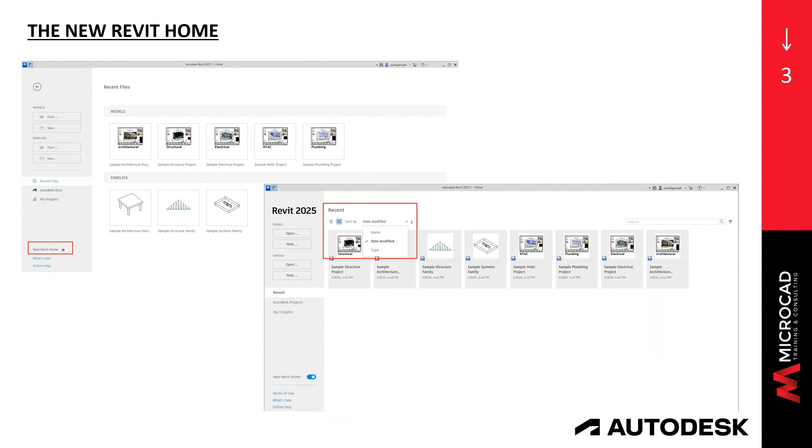So without further ado, let's dive straight into 2025. I am going to try to bounce between my PowerPoint presentation and the actual version so that you see the interface. The first thing that I want to point out is that there is an option of choosing a new home, so that the way that you see the home screen changes. Let me show you that live in Revit.

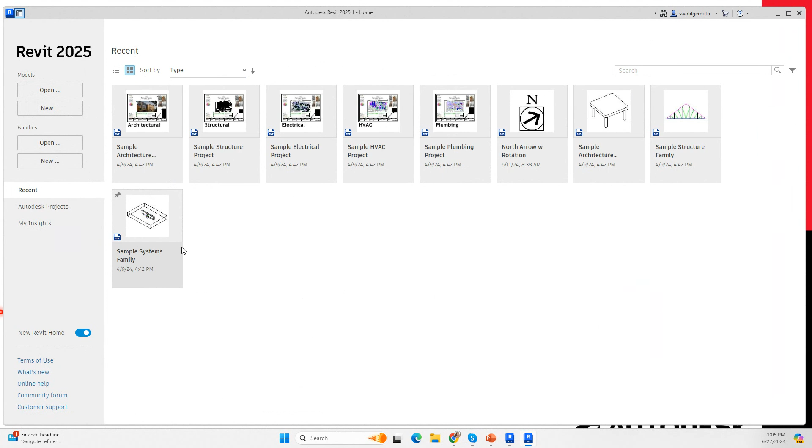When you come here to the Revit interface, notice down here it has this button that allows you to turn the new home on. And this is what it does. And then it allows you to sort your recent projects either by date modified or by type. When you divide them by type, it will give you Revit projects and families afterwards. So that is something that I wanted to make you aware of. Let me go back to my PowerPoint. That is what is explained here.

Next big improvement is that when you have coordination models and you go to Collaborate and you go to your coordinate tab, you will see the coordination model changes, and it will show you the changes by showing different colors. So new elements that have been added, or elements that have been modified, or elements that have been deleted will be highlighted.

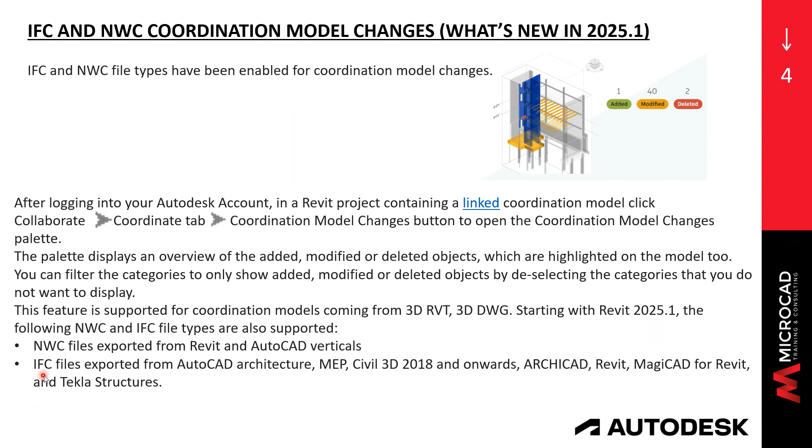As you always know, Autodesk pushes out the release, and then usually there is a 25.1 version of the software. So in the latest version, this will support Navisworks files and IFC files.

Next thing, and this I find really cool, is that there are sheet collections, meaning that you can create a sheet collection by going to the Sheets tab and right-clicking on it. You can create a new sheet collection, and then you can divide and classify your sheets. And then you will be able to print specific sheets.

So you can divide your sheets by design documentation, and then the sheet collection will be assigned when you are in the actual sheet. And then when you go to a floor plan, the floor plan will tell you in what sheet collection it is located. So it's a new parameter.

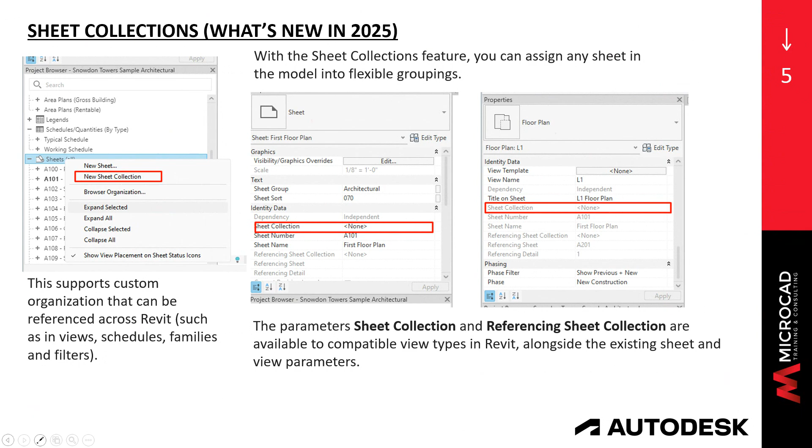Let me bring you into Revit and show you how that looks exactly in the Revit interface. Just give me a moment. I have a little dialog box hidden here in the background. Yes.

So, as I was saying, if you come here to Sheets and you click on New Sheet Collection, it creates this collection here that you can rename. So I'm going to call it, for example, DD, and then I can start putting sheets. It's like a new node under each sheet. Okay, back to my PowerPoint.

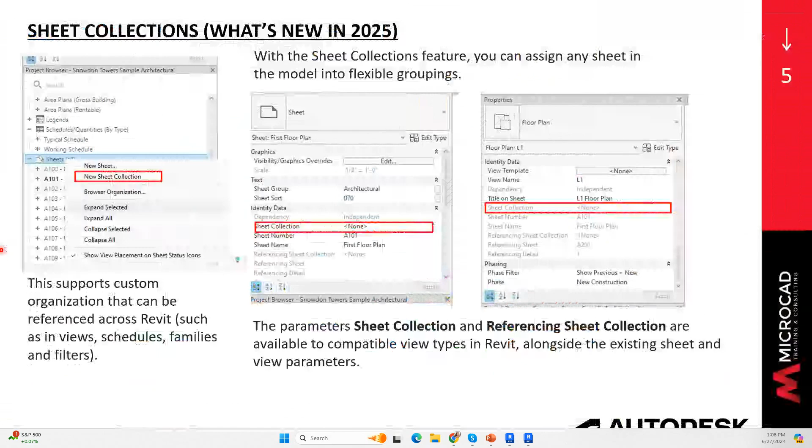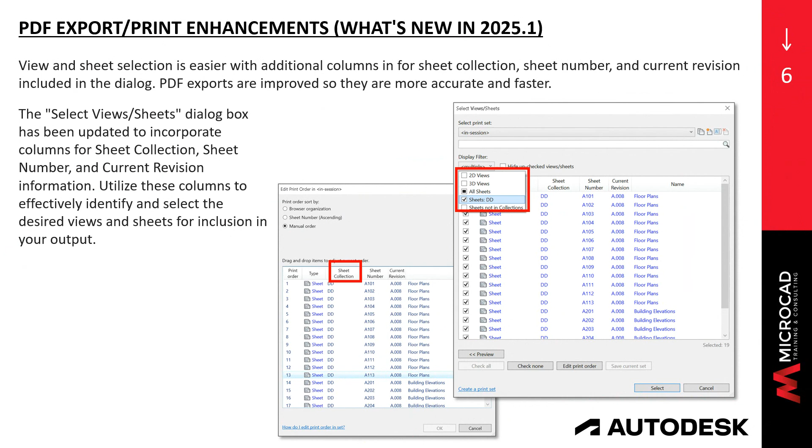With that new sheet collection, when you go to print, you will be able to define in your Select Views and Sheets dialog box that there will be a column that allows you to select the sheets that are in a specific sheet collection, or you can filter them out, right? When you go and you start to create your print sets, you can filter your sheets by whatever collections you created. I find that feature really useful. My little nerdy hands were doing a clappy dance on that.

For our MEP users, the export to gbXML is supporting the most recent version of gbXML. If you know, you can export your MEP models, create your spaces, create an analytical model and export it to gbXML, and then use that in your heating and cooling load software. So this is including support for HVAC data systems, zone equipment, air systems, and water loops. So this is very important for our MEP friends.

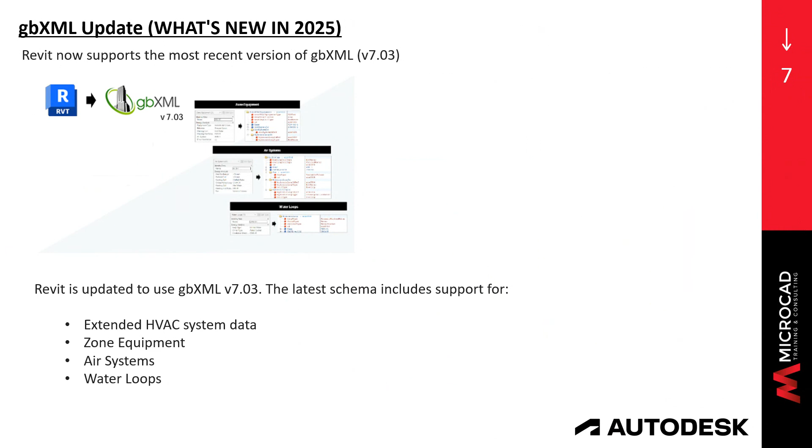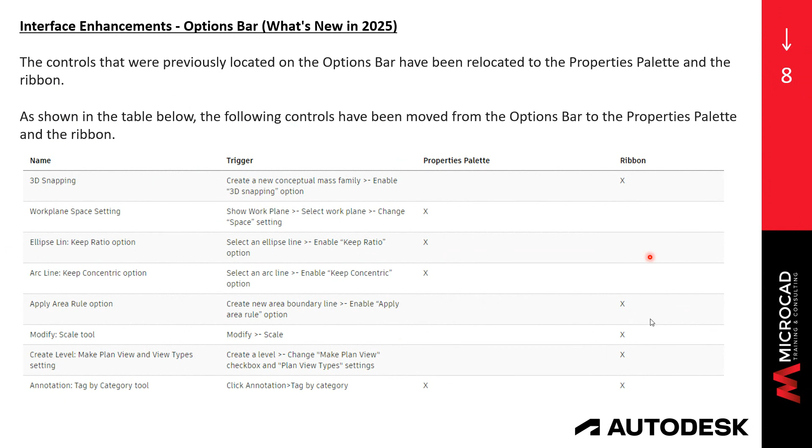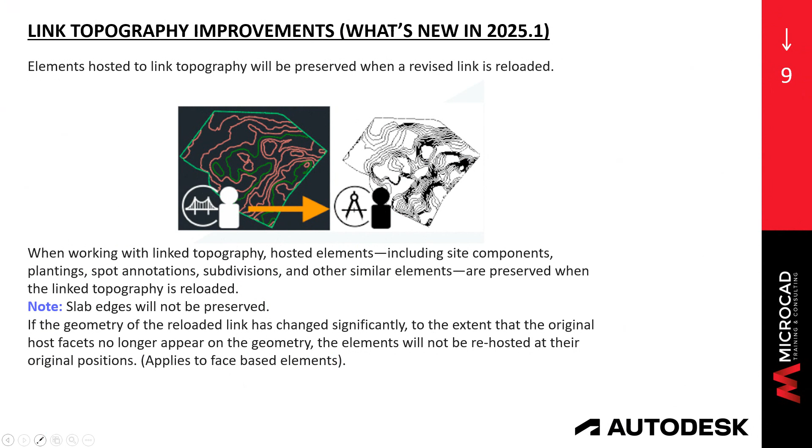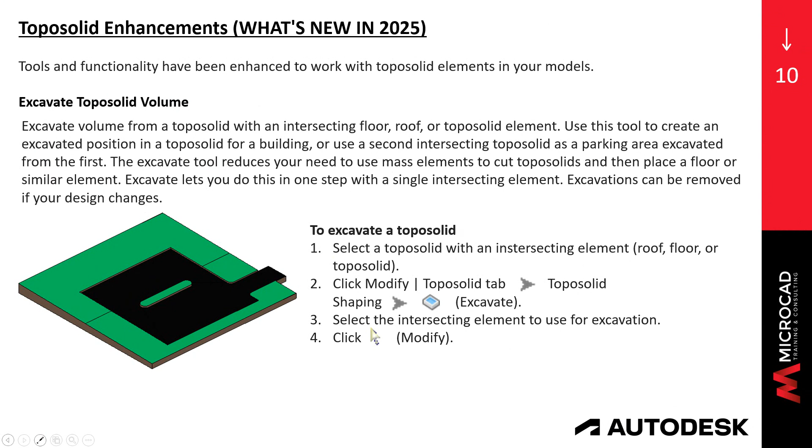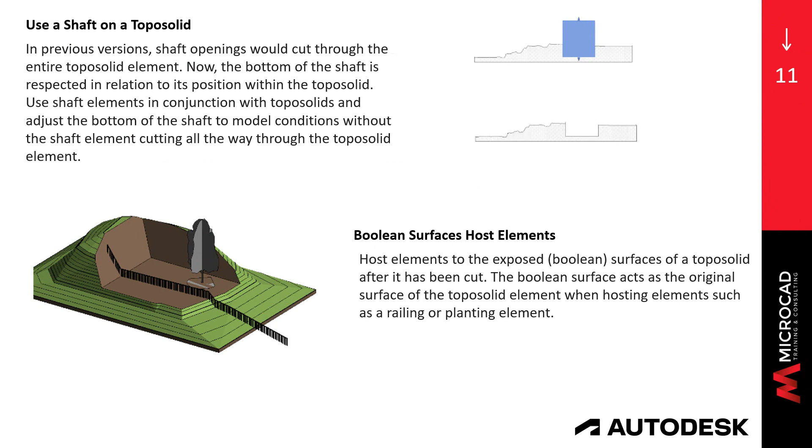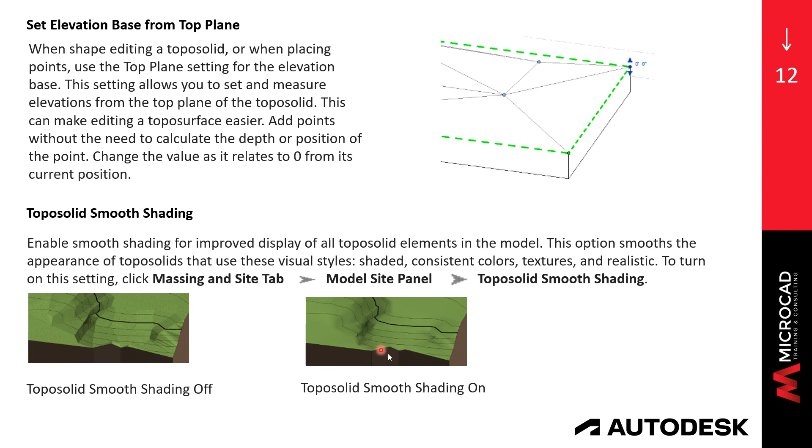Okay. You can enable it through the Massing and Site tab. You can go to Model Site, and there is a toposolid smooth shading. And then when your view is being shaded or shown in realistic mode, your topography won't look faceted. It will look more realistic, better shaded.

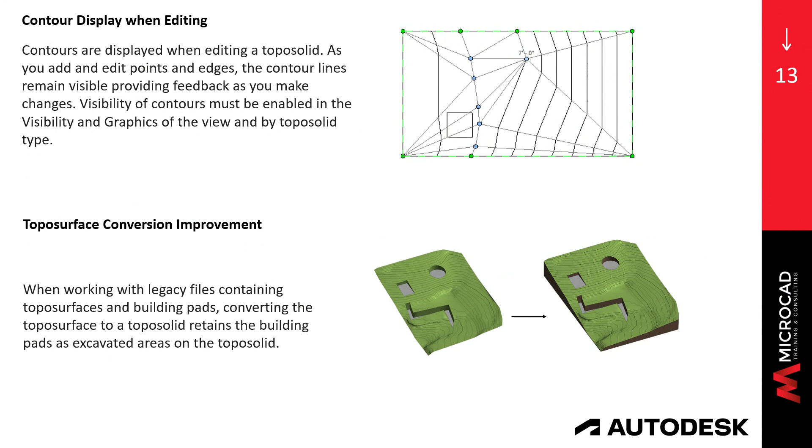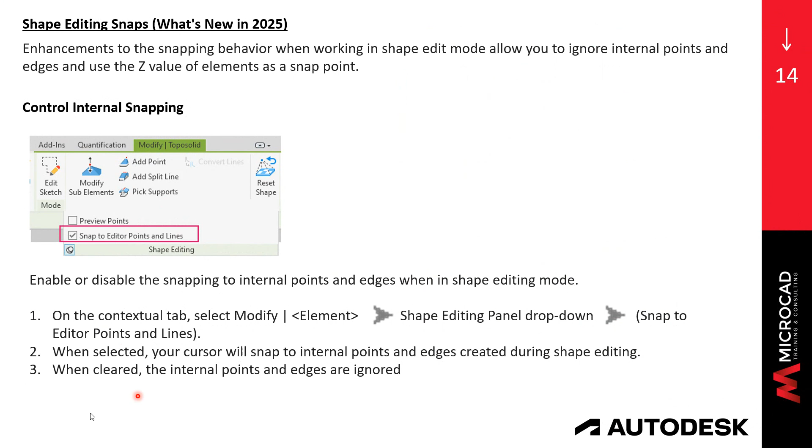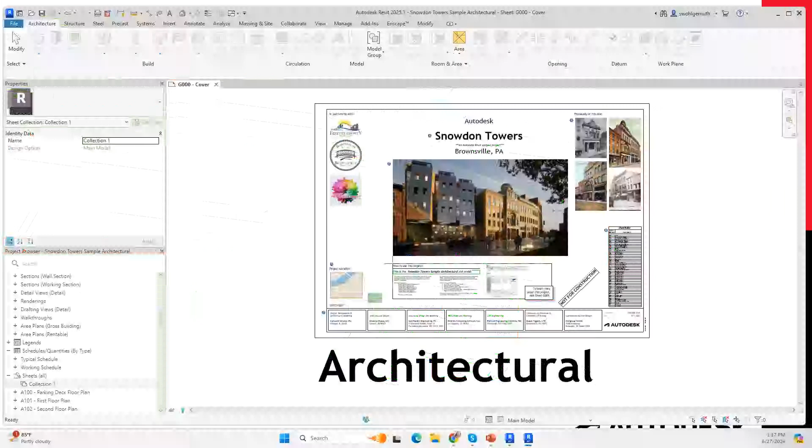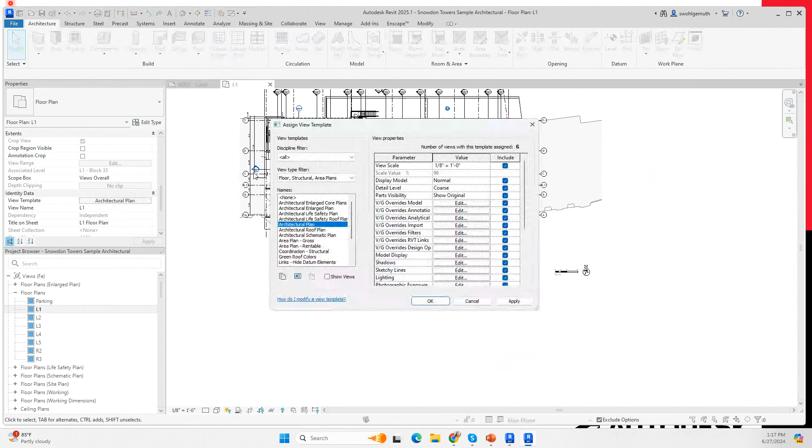The next improvement that I need to talk about, and this is also really, really cool, let me jump into Revit for a moment and go to a floor plan view. And I'm going to use this floor plan, but I'm going to jump a little bit here off to the side. Just give me one second. Yeah, I need to have a little bit of freedom of movement here.

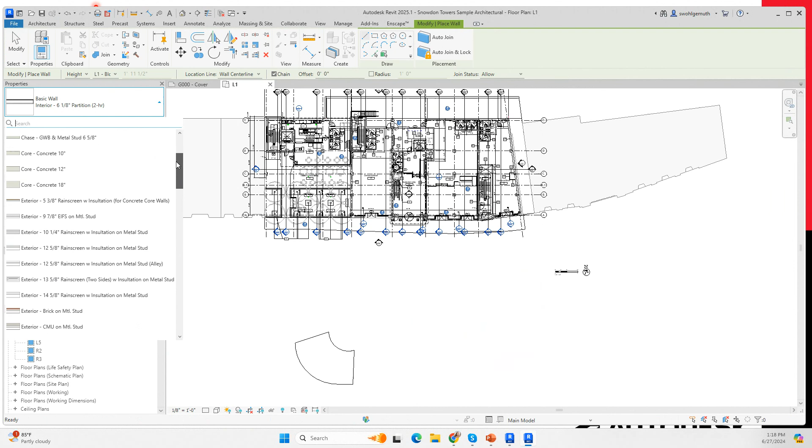And I am going to start a wall command, and I'm going to choose this exterior EIFS on metal stud. Part of the things that you need to do on this wall for this next tool to work is that you have to allow the wrapping, right? So I'm going to allow exterior wrapping, and I'm going to allow here both. And I'm going to draw my wall. I need to see my layers, so I'm going to show them as fine.

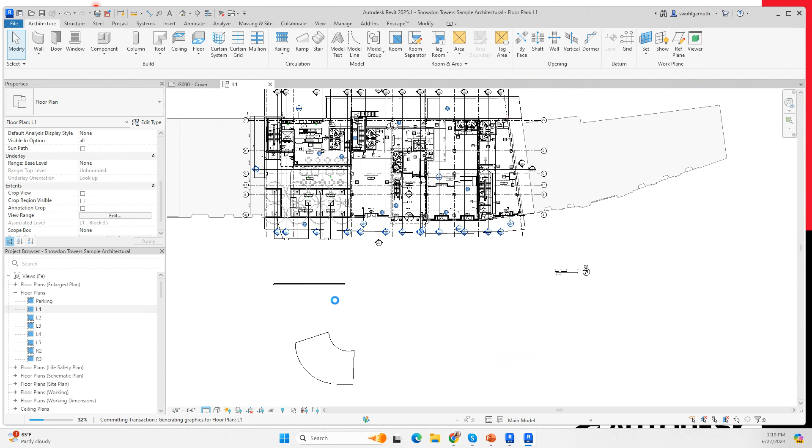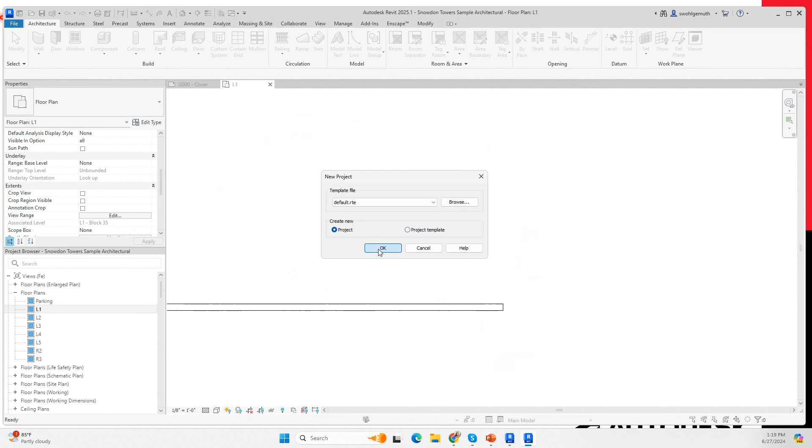So the first tool that I'm... sorry, just give me a moment. Just bear with me one second. Let me show you this better on this project. And I like this wall so much better. So a couple of things that I want to show here that happened to the wall tool.

I need to have fine. So when I select the wall, notice that in canvas now, you have the option to allow or disallow the joins. And this is happening in the actual canvas. So if I disallow the join, this happens, or I can allow the join back in. Before, you needed to come somewhere here and allow the wall joins and start this tool and come and choose the different options. So this is happening in canvas now.

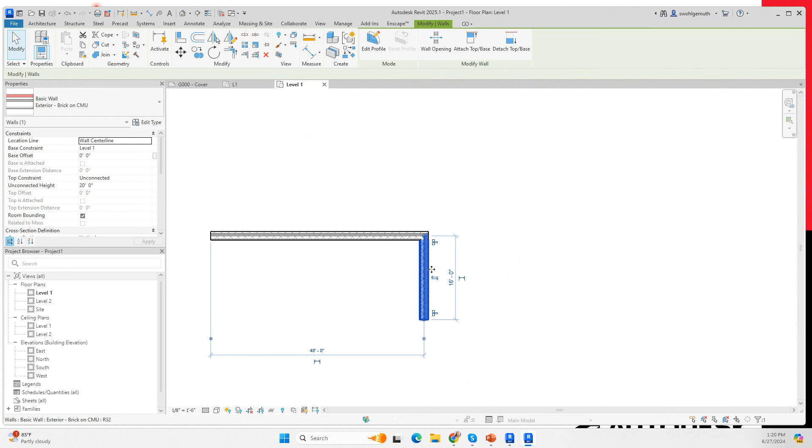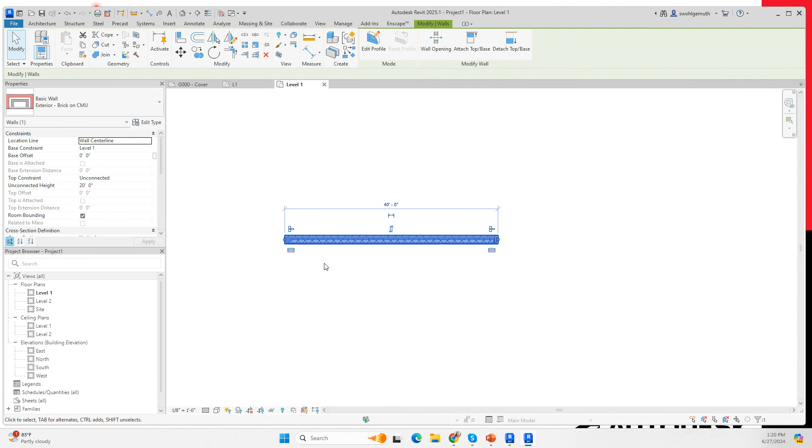And now let me just delete this little wall here. And let me select this wall and go where I was before and allow the wrapping, because once you allow the wrapping, it is going to give you another two little icons that I find very cool, right? So right now, the materials are wrapping, as you can see. When I select the wall, I can change that behavior within the canvas itself. Right now it's not wrapping, the materials are not wrapping, and now they are wrapping. Okay, and those are tools that are in the canvas now. And I wanted to show those in the actual software because I thought that those were also very cool.

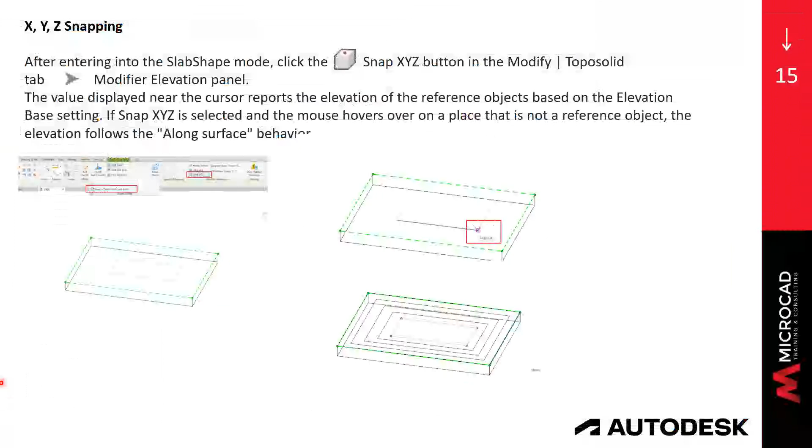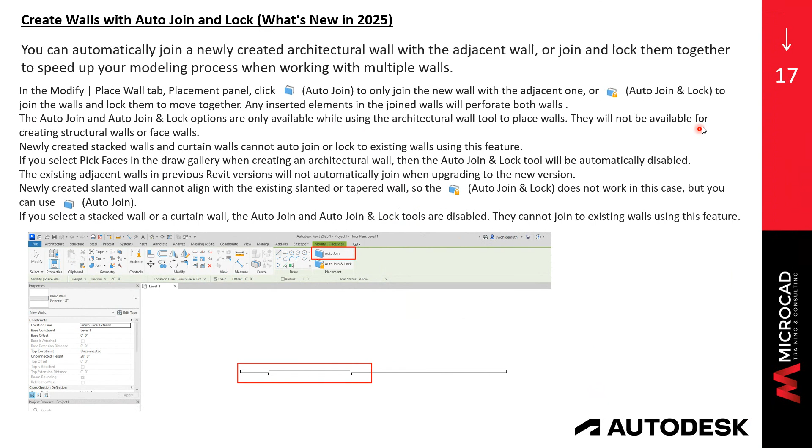Let's jump back to my PowerPoint, where this is explained what I showed you in the software. And this is another thing that is in the wall tool. When you start the wall command, notice that now you have this auto join.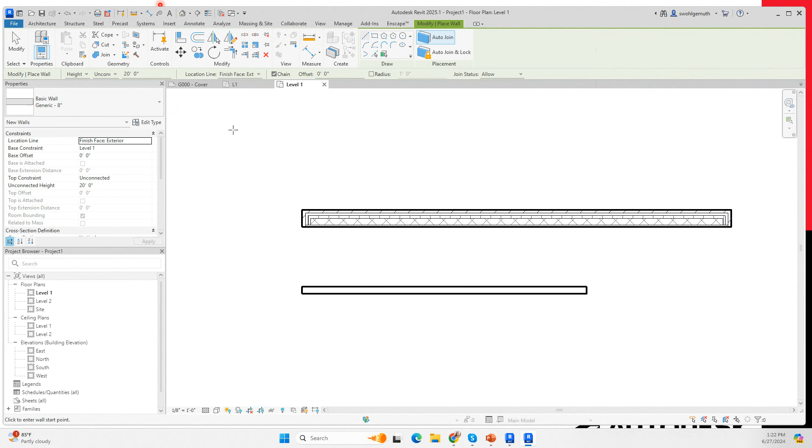So for example, if I grab an 8-inch wall, I'm going to use my finish face exterior, and I'm going to draw a wall. And then I'm going to choose the auto join, and I'm going to use the finish face exterior and set another wall here, and they're automatically joined. Okay, and that is, again, just to remind you, you can choose auto join, and then you can use auto join and lock that wall that is being added.

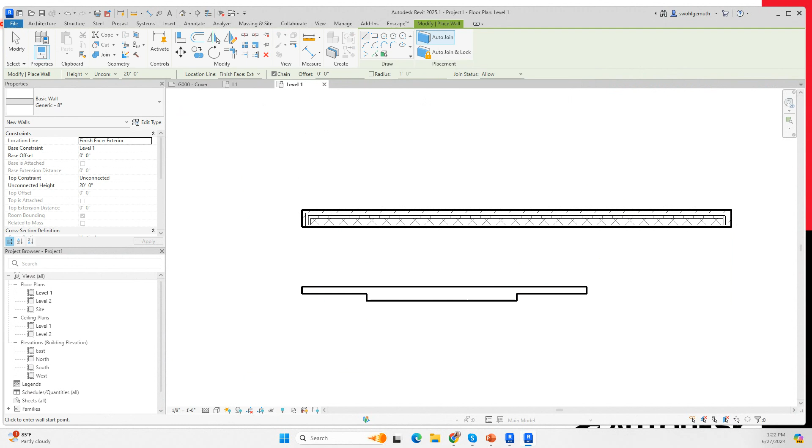Back to my trusted PowerPoint presentation. That is what this tool shows that I showed you in the interface itself. As I mentioned, for these little icons to appear, you need to go to the wall type properties, go to the structure, and allow the wrapping behavior.

Okay, and to me, those were my favorite enhancements. There are other enhancements for MEP, but because we have a bit of a time constraint, I chose at this point my favorite ones.

One thing I forgot to mention, this is also huge. You all know that when you're printing huge PDFs, Revit goes into no-one-can-touch-me mode, and you have to take a break, drink a coffee, chat with your friends while it finishes printing. PDF printing now happens in the background, and you can continue working. I don't know how many people will be happy about this, but it enhances your productivity.

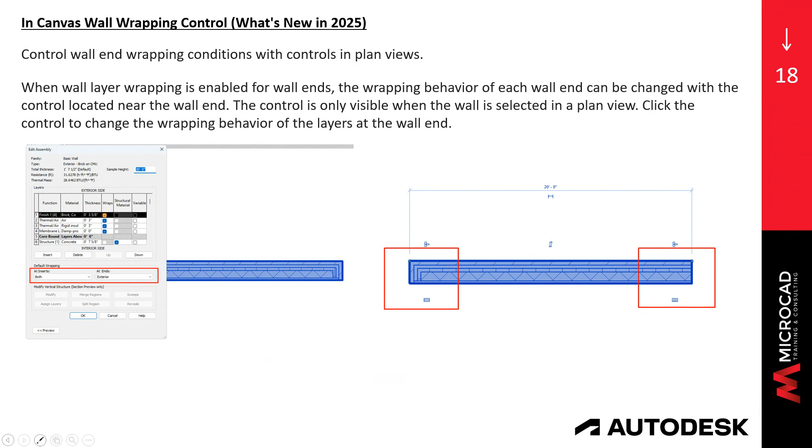And on that note, let me open up the floor for any questions you might have.